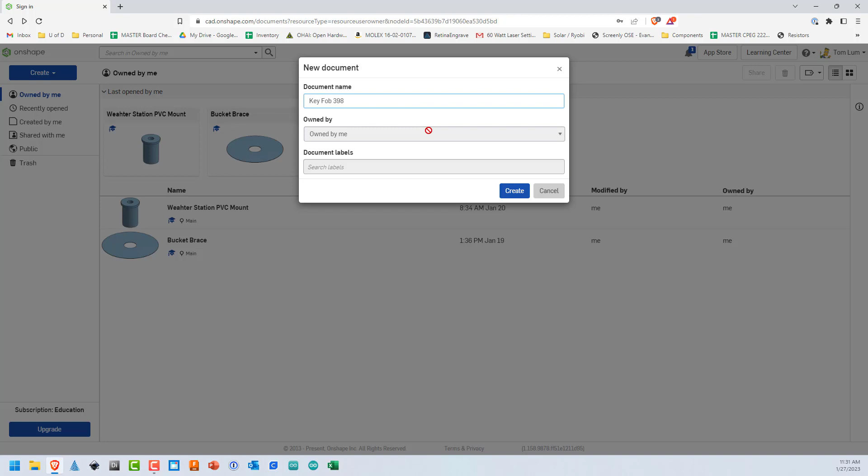So let's get started. All right, I'm going to create, and in Onshape they call these documents. I'm just going to go ahead and name it now, key fob 398, and click create. So it brings up here, we have on this side is kind of a timeline. Up top is our tools that will change depending on where we are in the process. You may see differences here as we go.

Over here is a view cube that allows you to kind of move around if you are not keen on using your mouse to do so. A couple of things you want to take a look at here is your preferences. Typically, I want to be a millimeter for my length units. It's up to you, but if you're doing anything with 3D printing, and especially with this key fob or anything that I'm working with, I would recommend the default units of millimeters.

So the rest of it won't be particularly of use to us for this project, but you may run into things with other projects that you're working on where you may need to change your units here. Also notice I am on this subscription education, as you should be. Hopefully, that'll last us plenty of time until you are out in the industry. All right, so let's head on back here.

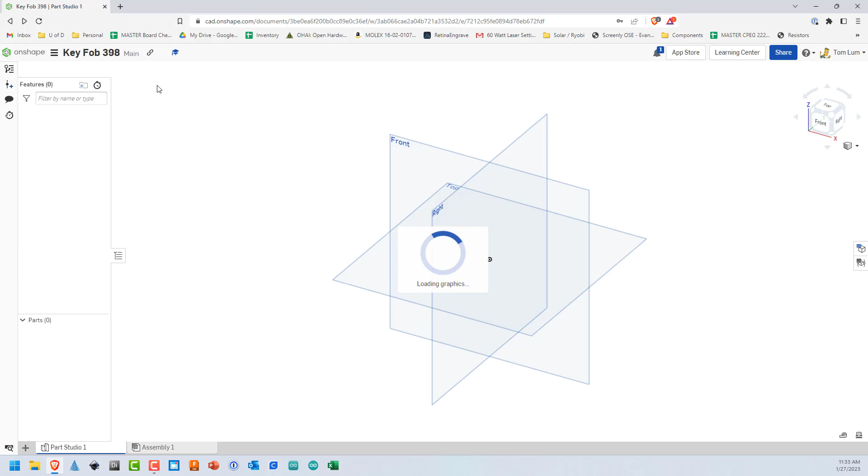All right, so first thing I want to do is create a sketch. That's with 3D modeling. Typically, you're making a drawing in 2 dimensions and then either pulling it up, extruding it, or pushing it in to cut, also known as an extrude cut, is the typical process. When we start out, we don't have any surfaces of our model to work with, so we're going to start on these planes, or in this case, I'm going to start on one of these planes.

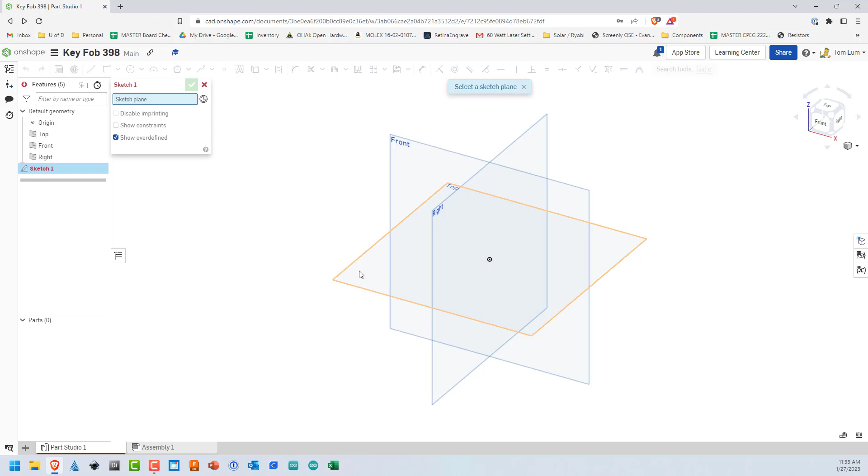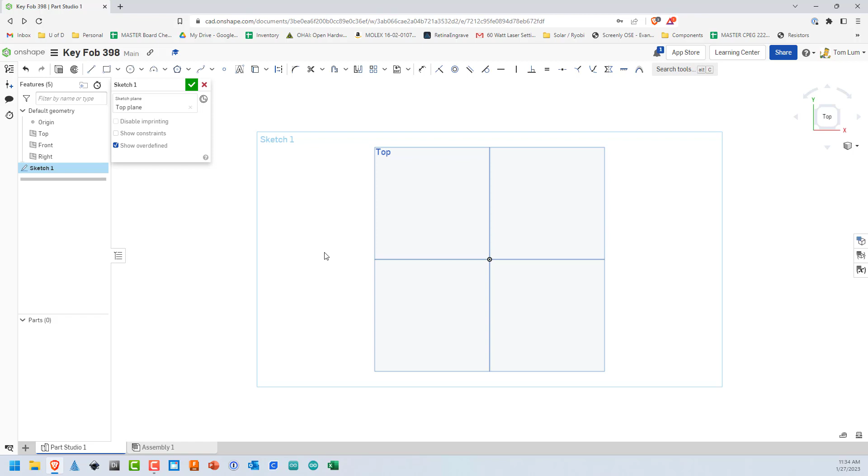So I'm going to go up here and click Sketch, and then I need to select a sketch plane. I'm going to select this one here, the top, and you'll see it kind of makes a larger version of that. Now, the issue is you may be used to Fusion or Inventor. It will zoom to this sketch plane, but in this case it doesn't. So I'm going to click the N key for normal, so that will face me perpendicular looking down onto this plane. And then I really don't want the plane here. I just want the sketch plane. So I'm going to hit the P key, and that allows me to get rid of all the planes.

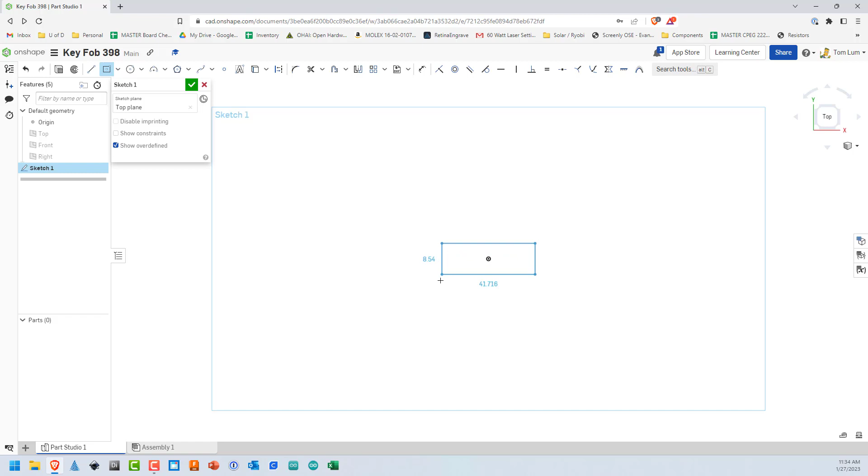All right. So going to select a center point rectangle. This is the sketching ones for rectangles. And you have a few different ones. Center point's the one I'm going to use. I'm going to go down here and zoom in a little bit. It doesn't really help. I'm going to hover over the center point, and you'll see it's a square. Click and let go, and then I'm going to pull out a rectangle. Doesn't really matter what size particularly. And I'm going to click one more time.

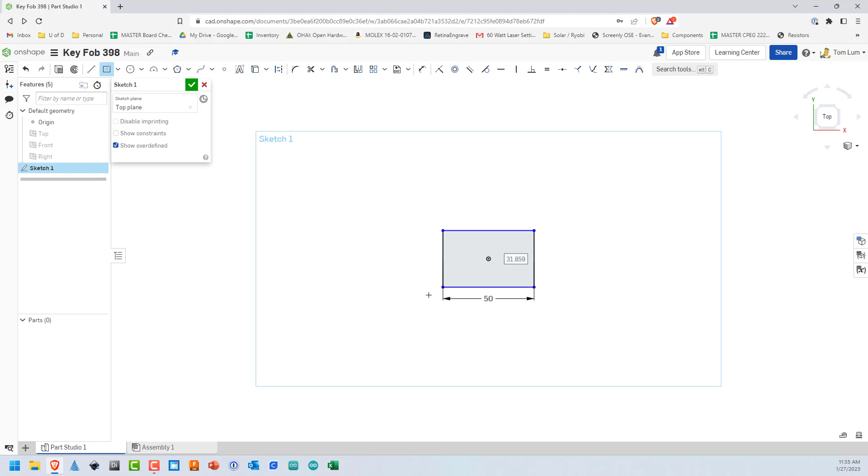Now you'll see that the dimensions are highlighted, it's not a very good highlight compared to Fusion, but here we are. So it has a square around it. This one is going to be 50. I hit enter, and now it's asking for the other dimension. That's going to be 20, and I hit enter. All right, so now I have a rectangle 50 by 20 millimeters. Remember, those default units were in millimeters. I'm also still in the rectangle sketching tool. So here is another one. You can actually just hit the escape key or the space bar to exit out of that tool.

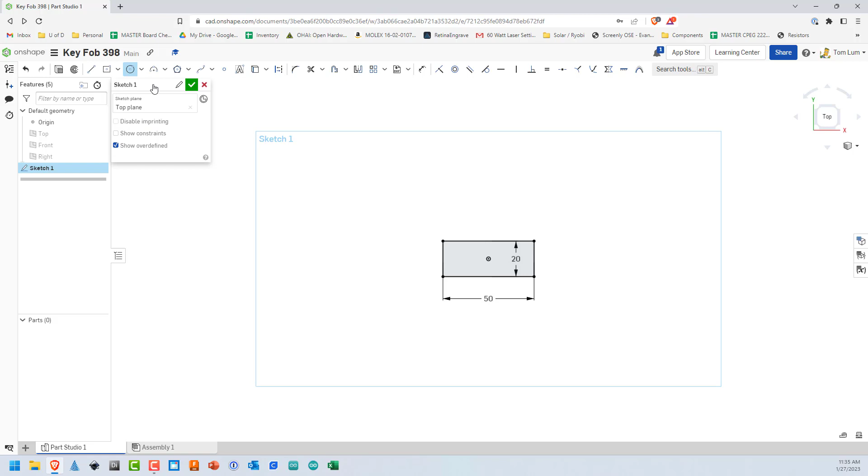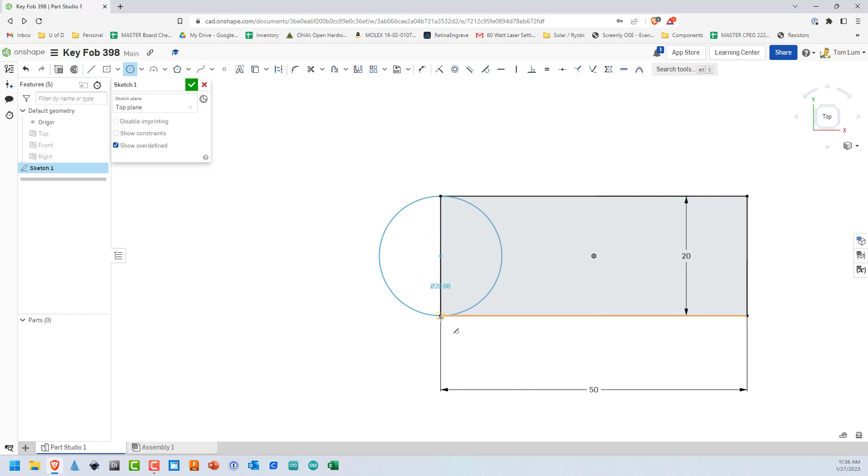So next tool I'm going to go is click up here on a center point circle. Click that. And then now I will zoom in and it'll be a little bit easier to see. I'm going to draw a circle on this edge here. And if I hover and get close to the center, you'll see a square pop up. That's telling me that's the center of that side. I'm going to click once and let go. And then I'm going to move my cursor up. You can go up top here or down below. It doesn't make a difference, but have it snap to the corner of your rectangle.

And you'll notice here it says 20 and it has a circle with a line through it telling me that's the diameter. Now I'm still in circle mode and I want to stay in it for a minute. I'm going to draw one more circle, also centered at the midpoint of that side. And this one I'm going to pull out, and I'm going to click and then type in 13 for 13 millimeters, and it's showing that dimension here. So that's the end of my sketches for this one. This is the general shape for my key fob.

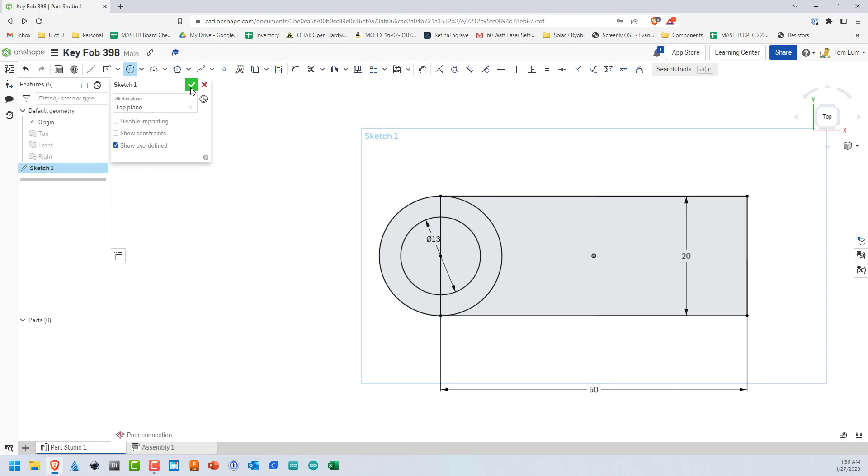So I'm going to go ahead and click this green check here telling Onshape that my sketch is completed. All right, so now I have the sketch looking straight down at it, which is good for sketching, but when you go to extrude, it's not very convenient.

Now, in preferences as well, if you scroll down a little bit further, there are mouse controls. And you can set these on whatever you're comfortable with. If you've never done anything before, you can try Onshape. Since I've used AutoCAD and Inventor and Fusion 360, I'm setting it to this one simply because it's more comfortable or more intuitive for me because I learned it using those programs. If you've learned using SolidWorks, you can go to theirs. There's not a lot of difference between everything, but it's mostly how to rotate things in space, how to zoom in, stuff like that.

Also, if you're using a scroll wheel in the middle of the mouse, hopefully you're using a mouse and not a trackpad. If, when you run the middle scroll wheel, it looks like it's going in the opposite direction, you're zooming in when you think it should zoom out, or zooming out when it should zoom in, you can reverse that here. A lot of times Macs have the same thing with scroll direction when doing long websites or long Word documents or something like that. So if it's not intuitive, you can click it here and go back.

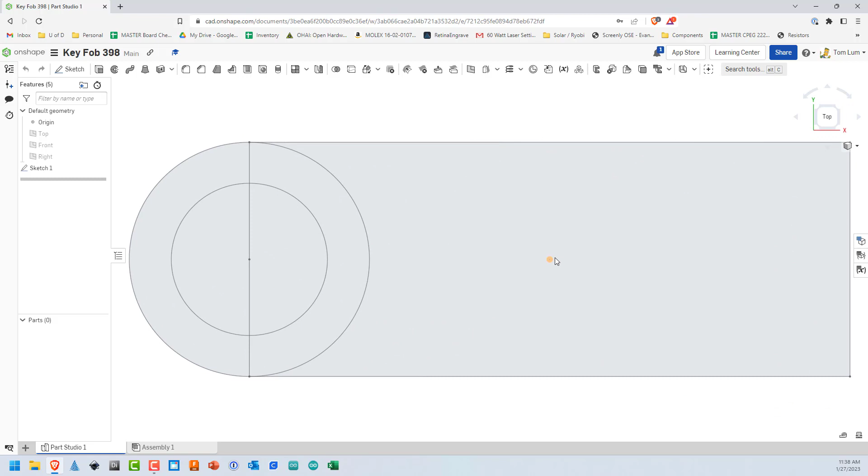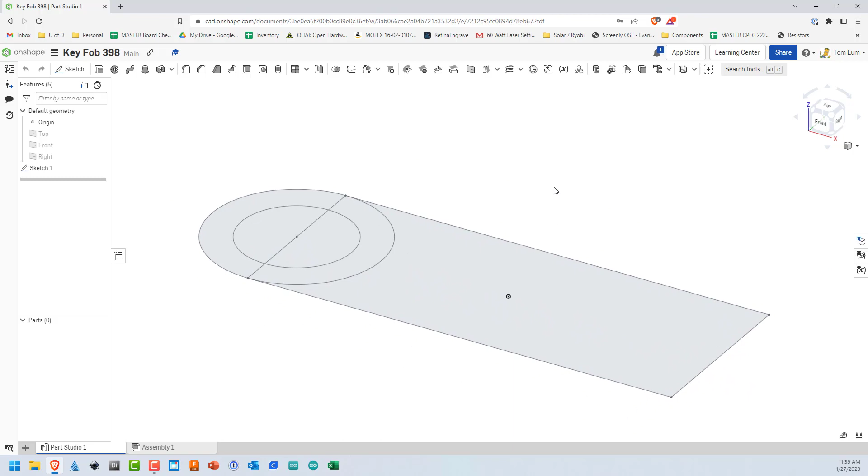All right, so now let's go back here, return to document. So it was like this, and this is what I was getting at. So I'm going to rotate this a little bit, kind of orbit it, and I'm doing it in the AutoCAD version. So I hold down the Shift key and the scroll wheel, and this allows me to kind of tilt this. You can also do it here. So we were like this, and I'll just click this view cube in the top right corner and put it on its side. This is why I was saying it's a lot nicer when you go to extrude to have it in this view. I'm also holding down the scroll wheel and I can pan left and right, up and down. So this will allow me to move things around a little bit. You can also do a lot of that up here.

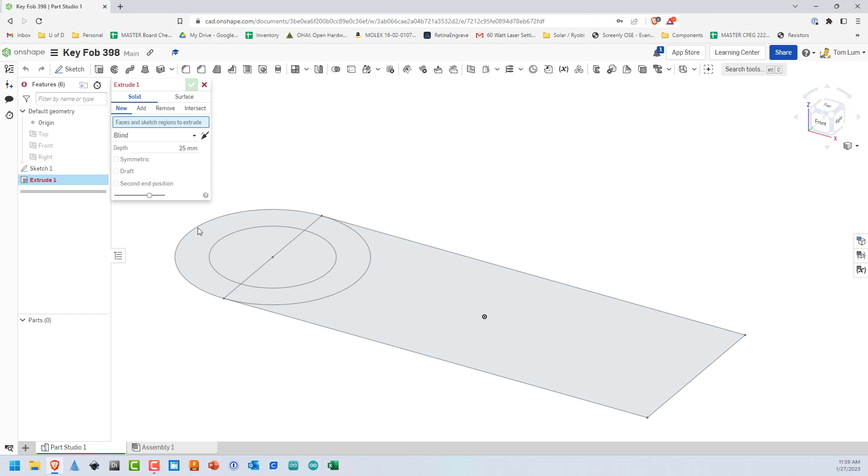All right, so what I want to do is go up here to extrude. This is where we have a sketch. It's two-dimensional, and extrude now brings me to the third dimension. So I'm going to click extrude, and I'm going to select this outer kind of rainbow here, this one here, and here. Now I'm going to zoom out a little bit so you can see what's going on. So you can see it's extruding all of this except that middle hole there. So I want that to be hollow. The only other issue is, though, this is way too tall. This is not a key fob. This is more like a doorstop.

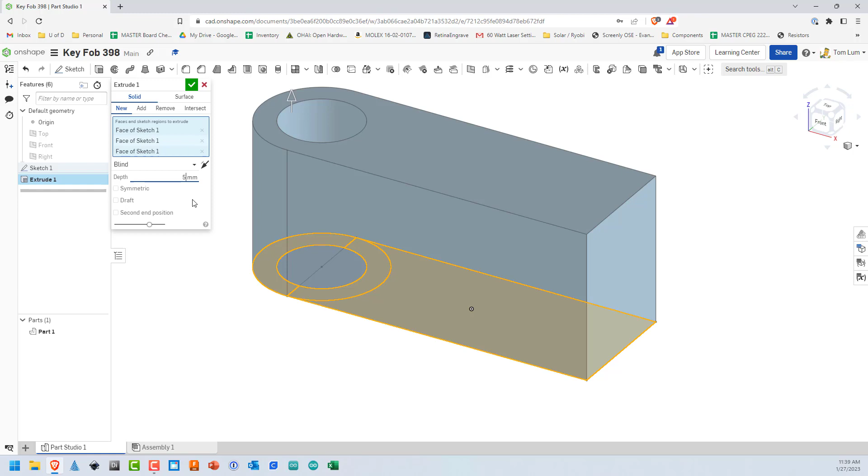So I'm going to bring this down to about 5 millimeters. And you can probably even go a little bit smaller if you want it a little bit quicker. 4 millimeters might be all right. Somewhere in that range, between 4 and 5. And then I'm going to click the check to tell it I'm done extruding. So now if I take a look at this, I have most of the key fob completed. The key ring will go through this hole. And then over here, I'm going to have some lettering, which I'm going to do next. And then lastly, we'll round off these sharp corners a little bit.

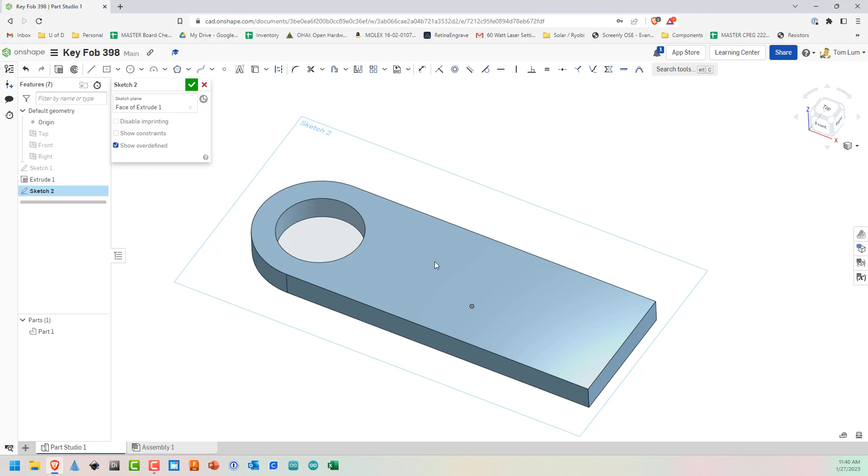All right, so let's get some text on this key fob. So I'm going to do sketch again. And now instead of picking a plane, I'm actually going to pick this face right here. And again, it doesn't rotate to look straight at it. So I'm going to hit N, as in Nancy, and that will normalize me to that face. Okay. Now, I don't want to hit X or anything. Just leave that. I know it's tempting to click there, but let's leave that alone.

All right, so moving down a little bit, we've done a rectangle. We've done circles. Those are common. Arcs are another one as well. And then shapes, polygons. But we're going to move down a little bit to text. So text works kind of the same way as the rectangle works, but I need to lay out where my text is going to go. So I don't want it to go over into the circle. I obviously don't want it to go off of the key fob.

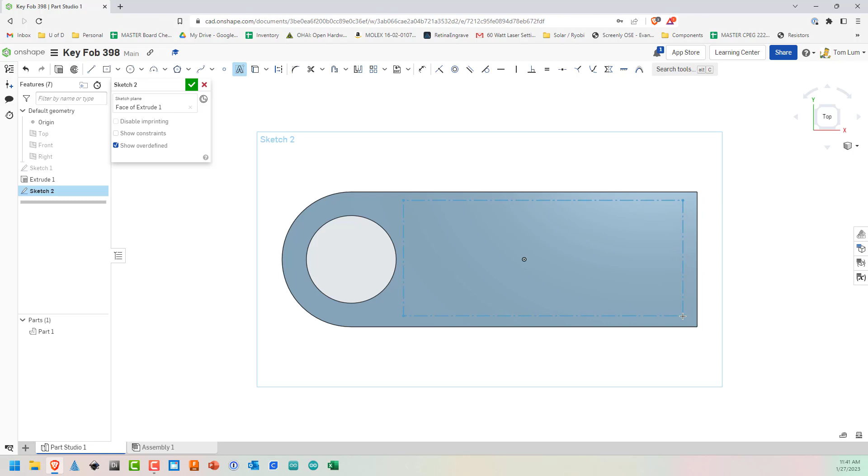So I'm going to select about right here, click and hold, and then drag out to near the bottom of the key fob. I don't want to go over or past any part of it. I want to keep it inside there and give it a little bit of a border. I don't want my letters going right up to the edge. All right. So now I've let go and it's allowing this default text.

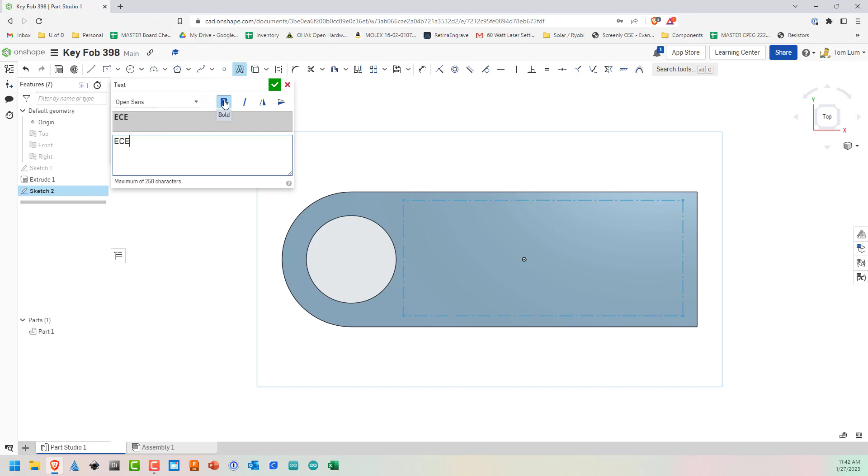I'm going to highlight and just type in ECE and make it bold. And then that should do it. So that's all I want. Now, if you want your initials or you want something longer, that's fine. If you get too long, however, it may actually cause it to wrap around, or you may have to extend your key fob a little bit. The printer can only print so small, so be careful there.

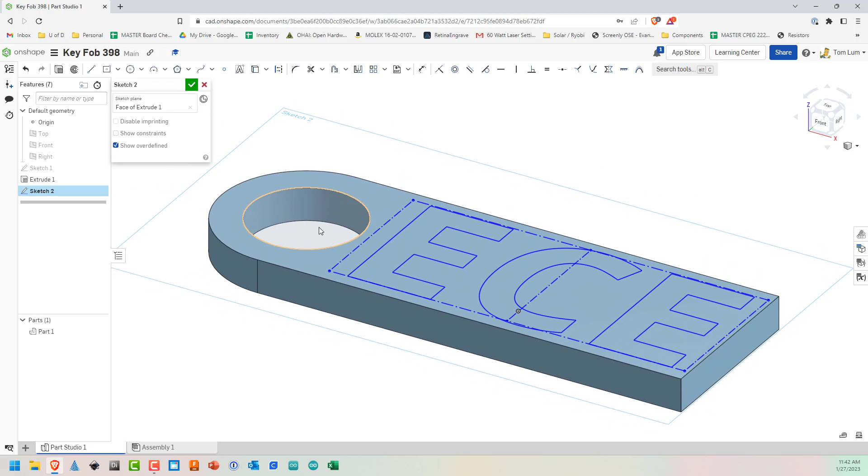So there's my letters. And again, I'm not really happy with being face on here because I wanted to extrude these. So I'm going to click this bottom right corner again. And another thing you can do once you get it to here, like if it's zoomed in too much, you can hit the F key for Frank, but it's also for fit. So that will fit your sketch or your part in the screen. All right, so that sketch is done. I click the check mark and now extrude again.

So this time I'm going to change this before we even get started. I'm going to just do 1 millimeter and we're going to click the E, the C, and the other E and click OK. So there we have it, our key fob with our letters extruded a little bit. They're not too far out, but it's pretty good. Click that again. All right, so now these corners can actually be remarkably sharp. So we're going to round this stuff over a little bit.

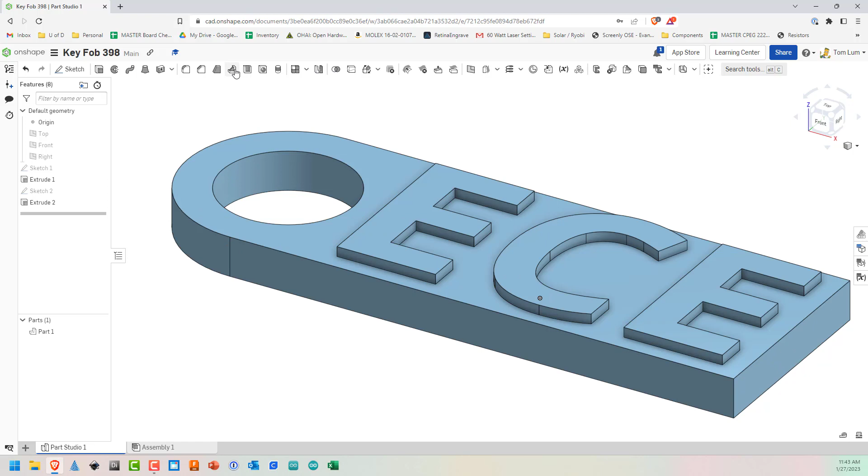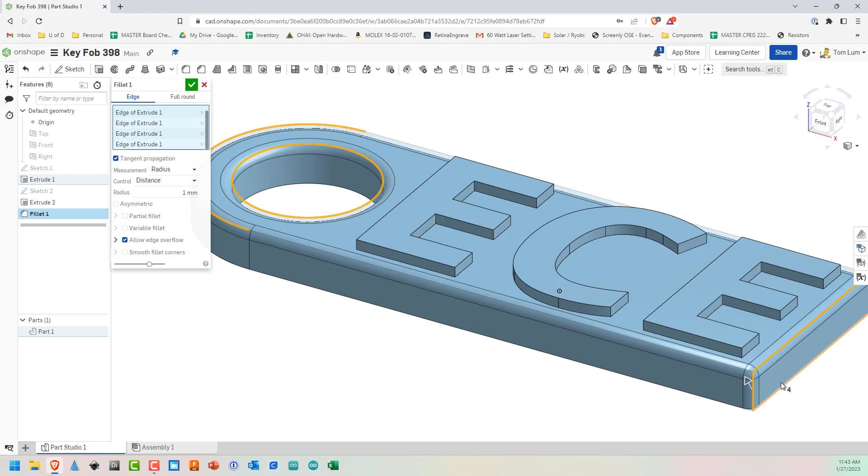So to do that, that is called a fillet. I'm going to click right here and click this one. You'll see what it does here in a second. It just rounds that over, kind of like taking a piece of sandpaper and rounding the whole thing over. I'm going to move by holding down the middle mouse button, the scroll wheel. I can move around. I'm going to click here. That's going to round that top edge. Also going to click this one. That'll round it. And here. And then I'm going to hold down Shift and my mouse button, but you can also do it here as well. I'm going to round this one as well.

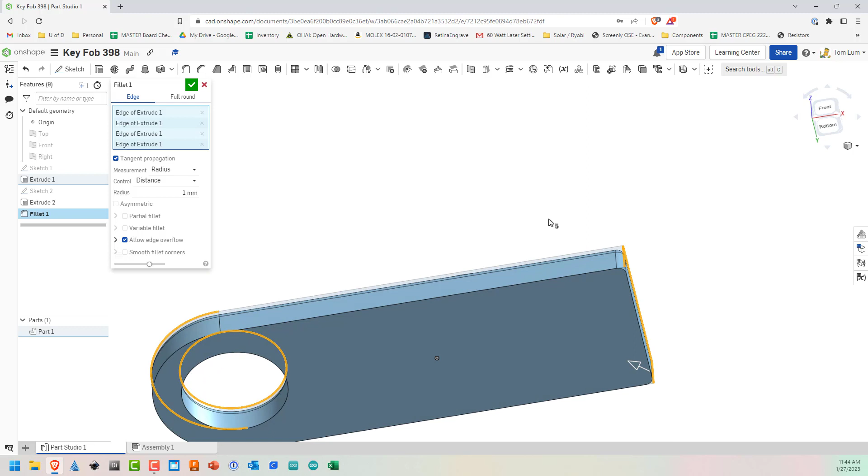So what do I got? Well, now I've rounded this one, this interior of this hole, and then all around these other ones. Now you may wonder, hey, should I do the bottom one? You could, but when you start rounding the bottom that's going to go onto the print bed, you can end up with some parts that are unsupported and can kind of look bad. So we're going to leave that one as flat for right now and go back here. And I'm good with the fillets, so I'm going to click the checkbox.

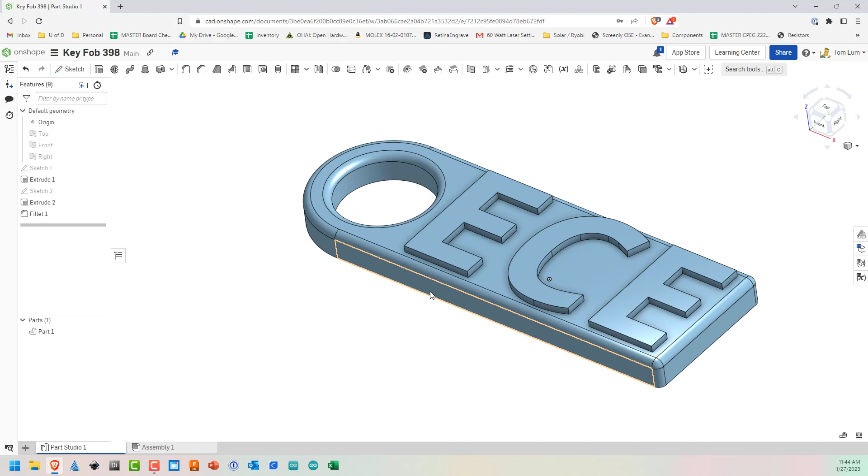All right, so there we have it. You can see also now why I didn't want the letters to go right up to the edge, because the fillet is kind of taking that edge and rounding it over a little bit. So if I was unhappy with any of that, I could actually go back to this sketch here, right-click and hit Edit, and then change some things up, move this around, things like that. But I'm going to put her back there and be good with that. All right. So that should do it.

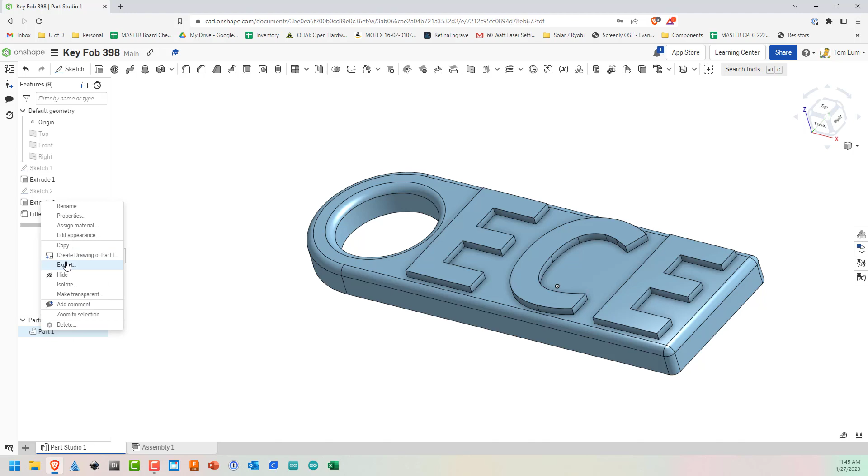Now we're going to need to print it. So last thing, I'm going to go down here now. This is all of the kind of like the timeline of what I did. I did a sketch, then I extruded, did another sketch, extruded, and then I filleted or rounded off those edges. This is the part that I created right here. I'm going to right click and go to export. So what do I want to do? I want to export this. I can call it whatever I want, key fob.

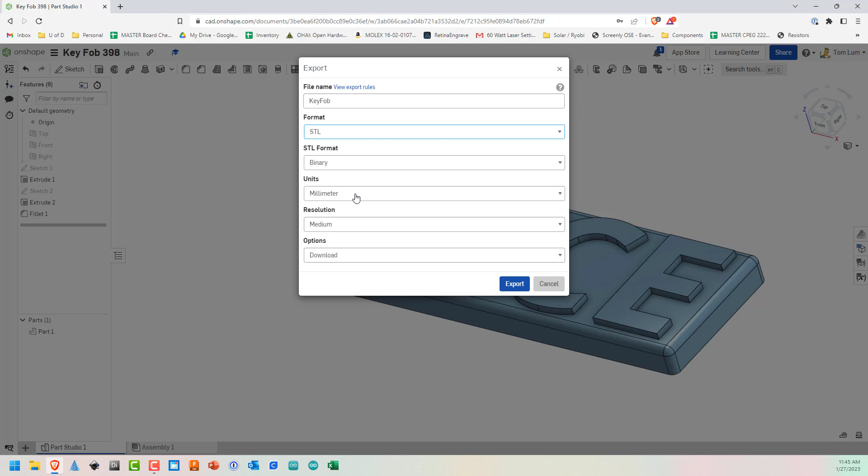And then the format I want is STL. That is what the printers recognize. There's a few others here that they recognize, but STL is a good format for now. Leaving it in binary. Millimeter is important here. You do not want inches. The slicer software Cura recognizes things coming in millimeters.

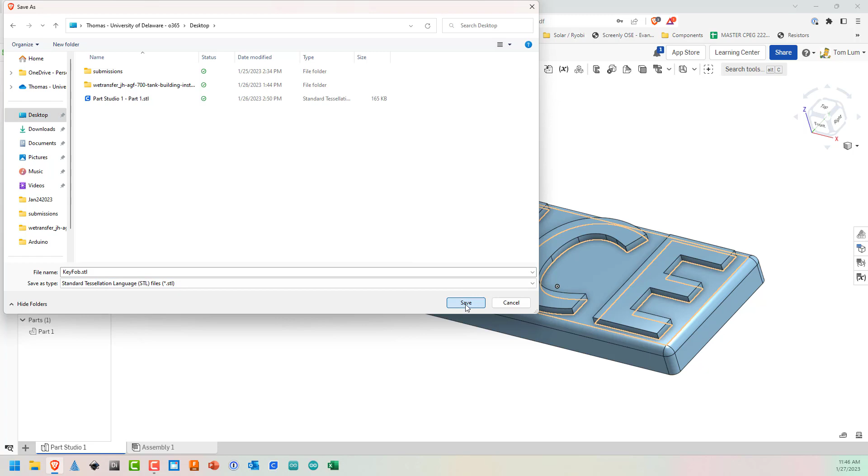So go ahead and export that, and it's going to ask where to put it. So you can put it wherever you want on your desktop or on your laptop or whatever, or even save it to a flash drive. I'm just going to put it right here for now, and then click Save. So that'll take care of it. Next step will be opening it up in Cura and then slicing it and printing it. But this is the basic design process for designing something in Onshape.